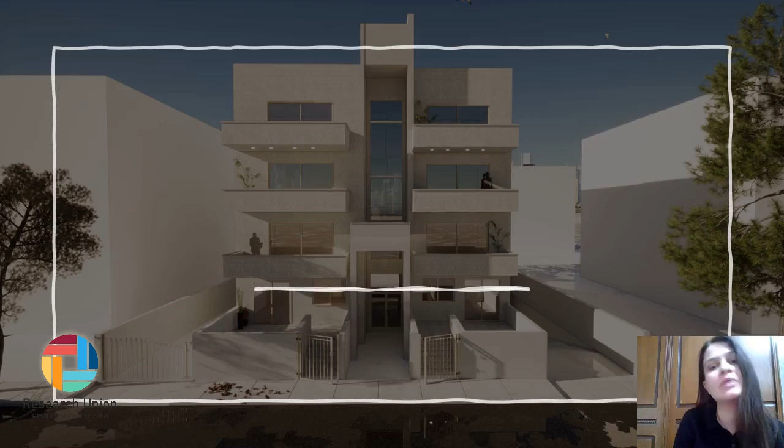My name is Dalia Al-Swatli, and I'm an engineer with a master's degree in advanced architecture.

Today, I will be discussing my latest research, a comprehensive evaluation of thermal performance and time lag in residential buildings or residential apartments, a numerical simulation study on phase change material and mycelium integration in Amman.

In this conference, I will be discussing the introduction, methodology, results, and discussion, then wrapping it up with my conclusions and recommendations on this research.

Starting with the introduction, I will be dividing my title into three parts and discussing each part alone and the specificity of each term. Starting with the first part of the title: a comprehensive evaluation of thermal performance and time lag in residential apartments.

Why did I choose the specificity of thermal performance? Because, as I said in the title, this research was held in Amman, the capital of Jordan. Jordan is a country in the Middle East that has multiple advantages to live in, but one of its disadvantages is that it lacks energy sources, especially non-renewable energy sources.

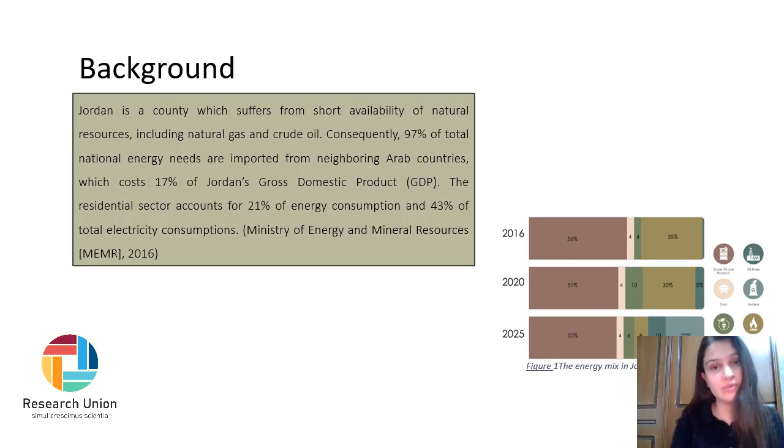As seen in this illustration that I have done, throughout the years from 2016 to 2020, and as predicted in 2025, the most reliance on energy consumption was on crude oil and its products. Crude oil is one of the non-renewable energy sources that here in Jordan we actually import from our Arab countries or nearby Arab countries, which means that we have a very huge problem since the most reliance was on crude oil, and it's an imported energy source.

Maybe some of you are now thinking about why don't we use renewable energy sources since it's everywhere and surrounds us, such as solar energy, windmills, and other sources. Because each energy source needs its own tools, and yet we haven't implemented the tools yet here in Jordan.

Starting with my title, I will be dividing it into three parts, as I said. The second part of the title is in residential apartments. Why did I choose the sector of residential apartments?

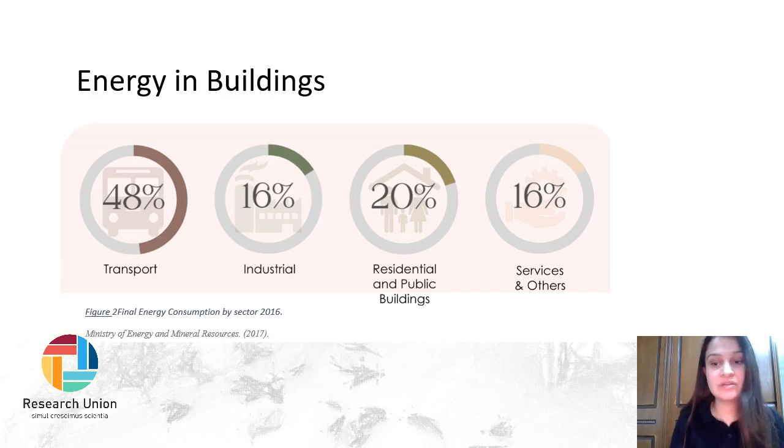As illustrated here, we have four main sectors in energy consumption. The first one is transportation, ranking first with 48% of energy consumption. Then what comes second is residential and public buildings, meaning residential apartments actually consume about 20%. It ranks second among sectors here in Jordan in reliance on non-renewable energy sources and in consumption of it.

The third and last part of the title is a study on phase change material with mycelium integration. This material is what I studied in this research, and it was what I thought of as a solution to the problem that I mentioned before.

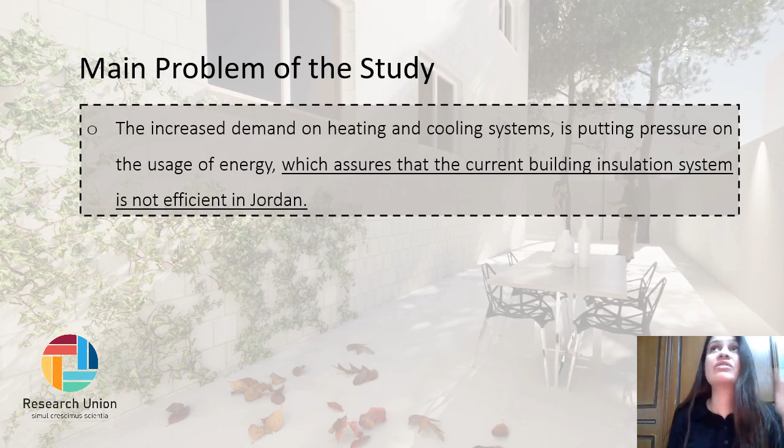What was the problem actually? The problem is that there's an increased demand on heating and cooling systems here in Jordan in the residential apartments and residential buildings, which means that there is an efficiency problem with the thermal insulation.

Starting with the material, the phase change material mycelium integration, it's actually a combination of two materials. The first material is phase change material. What is phase change material?

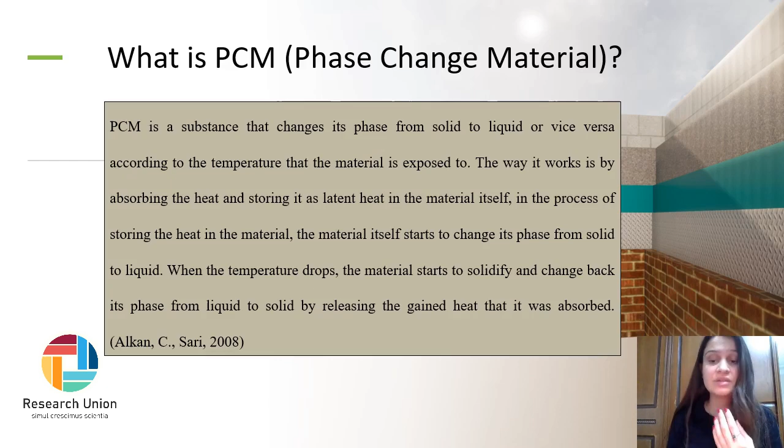Phase change material is actually a self-explanatory material because it changes its phase. It's a material that changes its phase when it is exposed to heat, from solid to liquid, and when the heat drops below a certain degree, it releases the heat that it consumed, turning its phase back to solid.

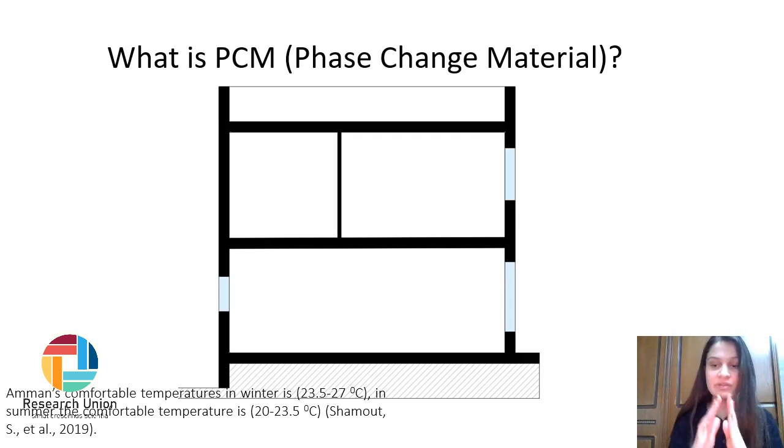How would I be using it in the residential apartments or residential building? It will be a layer between the layers of the residential envelope. What will be the envelope that I will be studying? It was the ground floor slab, the exterior walls, and the roof of the last level of the residential apartment—a specific envelope of the residential building. The phase change material will be a layer implemented between the other layers in the envelope.

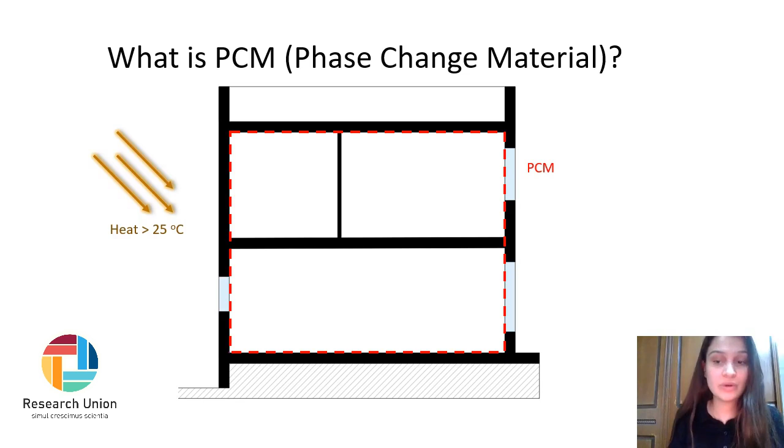How would it work? When the phase change material, or the envelope of the building, is exposed to 25 degrees Celsius of heat or even more, the phase change material will keep on absorbing the heat, decreasing its entrance into the enclosure, saving the enclosure's perfect temperature and perfect environment. Then, when it absorbs the heat, by default, such as an ice cube, it will change its phase from solid to liquid.

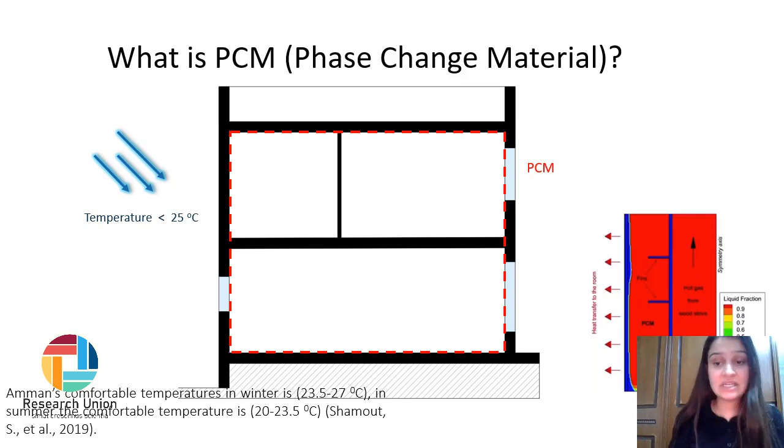When the exterior temperature drops beneath 25 degrees Celsius, the phase change material will start to solidify, changing its phase from liquid to solid, which happens when the outdoor temperature is a bit chilly.

Here's an illustration showing how the phase change material changes back to solid while releasing its heat into the interior.

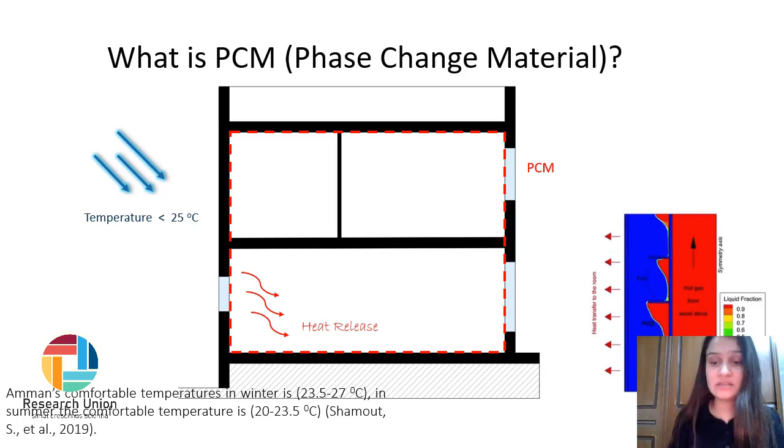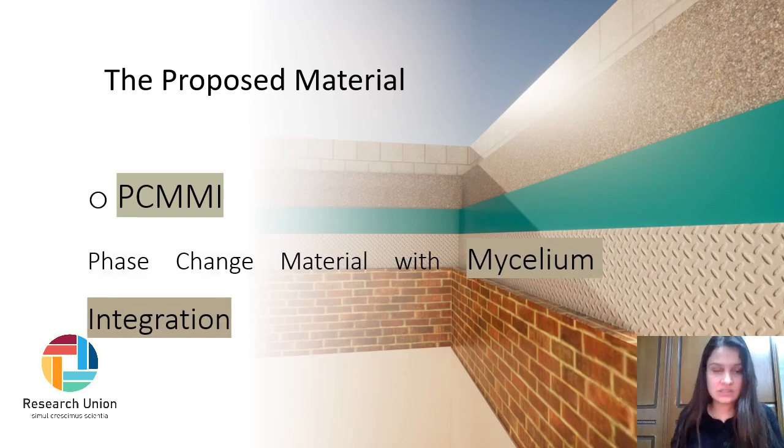The second material in the combination of phase change material mycelium integration is mycelium. Why did I choose this specific material? What is mycelium? It's a deciduous fungus, a material that surrounds us everywhere—you can find it everywhere.

Multiple researches have been done on mycelium in architecture, and most of them recommended studying this material with phase change material, which is what I've done here. Mycelium boosts the thermal performance of phase change material, acting as a thermal booster for it as an insulation.

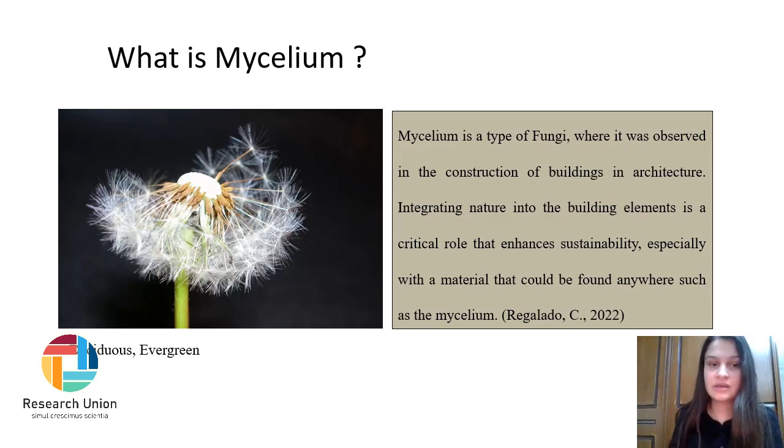So here comes the phase change material in a general way, with mycelium integration. Again, the envelope I will be studying here is the roof, the ground floor slab of the residential apartment, and the exterior walls of the residential building.

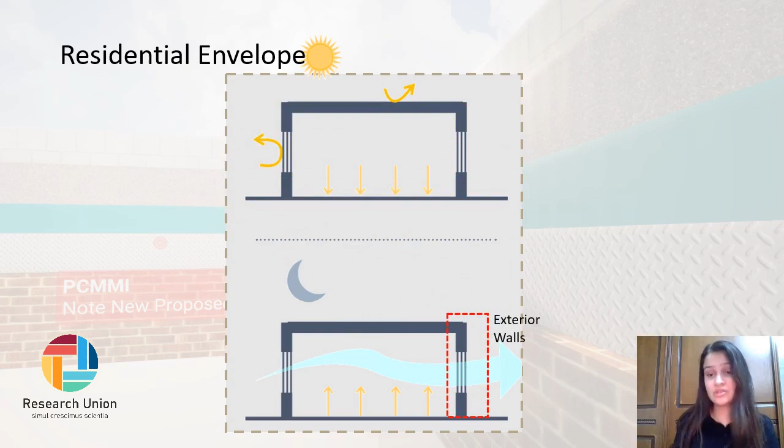To wrap things up, what is my main problem here? Residential buildings in Jordan have heat gain in summer, meaning we need to power the AC and use more electricity to cool the enclosure, while in winter there is heat loss, meaning the building isn't helping itself—we try to heat it, but the heat escapes somehow.

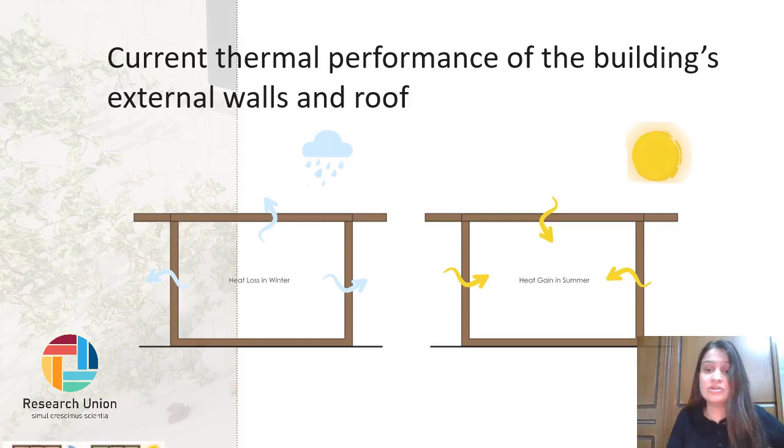My solution was to turn the residential building into what is called a thermal mass. What is thermal mass? It's when the building or residential apartment is able to cool itself and heat itself on its own, which is what the phase change material mycelium integration will do by implementing it as a layer in the envelope.

In the daytime there's heat absorption, decreasing the amount of heat entering the enclosure and, by default, the energy needed to cool it. At nighttime or on colder days, the phase change material releases the heat it absorbed earlier, decreasing the amount of energy needed to heat the interior.

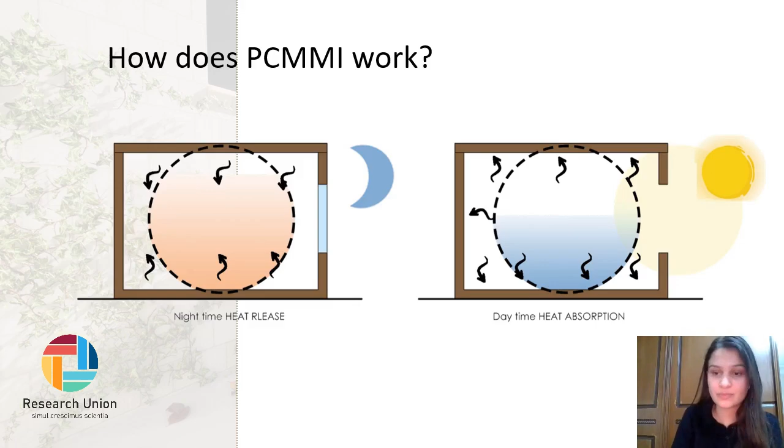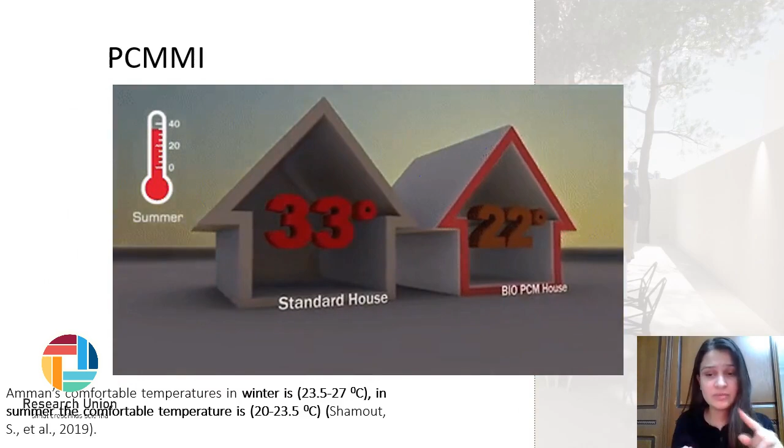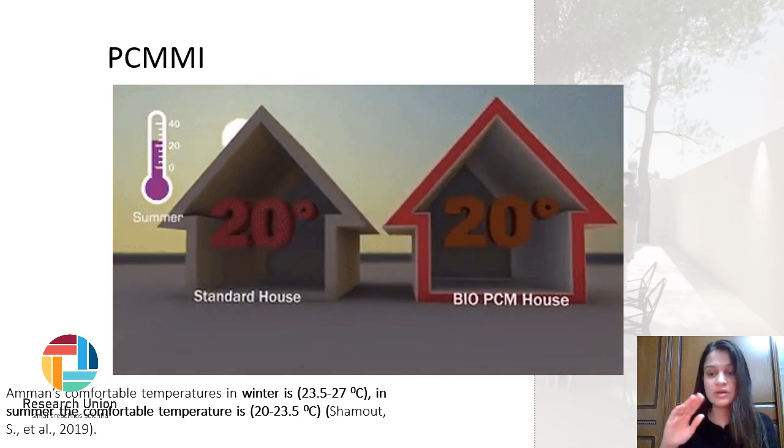Here's an illustration showing two buildings, one without the PCMMI and one with it. Without the PCMMI—the one without the red outline—you can feel the full spectrum of temperature throughout the 24 hours of the day, while with the PCMMI, the temperature is kept comfortable, only between 19 to 21 or 22 degrees Celsius.

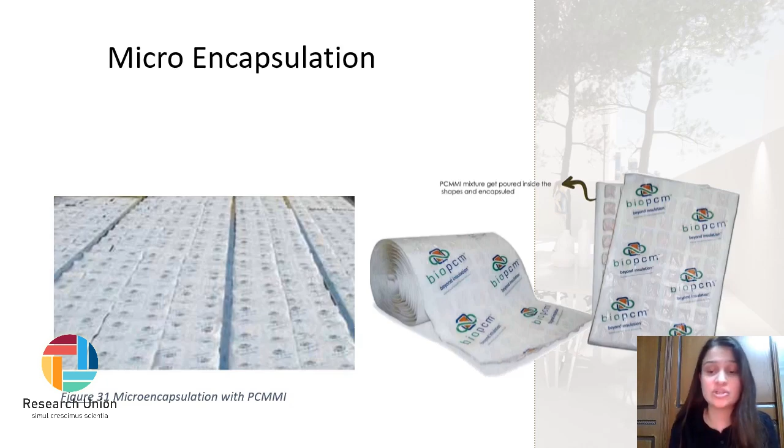Now I know there's a question popping up: the phase change material changes phase into liquid at some point, so how wouldn't it leak into the interior? That's by using microencapsulation, a type of enclosure used only for the phase change material mycelium integration or bio PCM. The mixture is put into these encapsules, which are then closed, allowing it to expand and shrink without leaking into the interior.

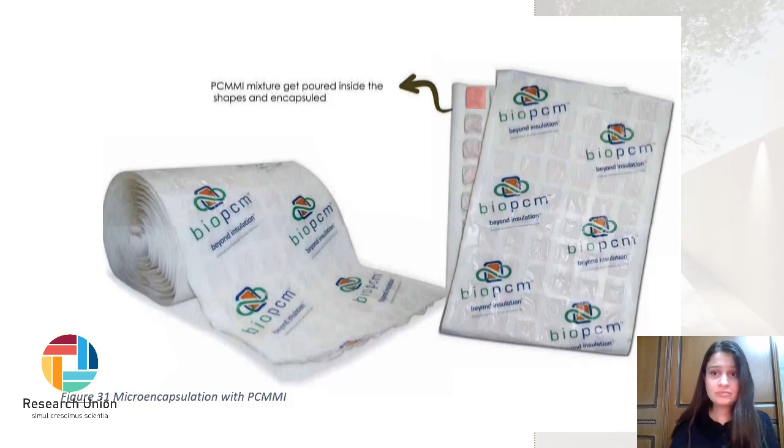PCMMI in Jordan can be found on the eastern side of the Dead Sea because it's a type of salt, since I've studied the inorganic PCMMI.

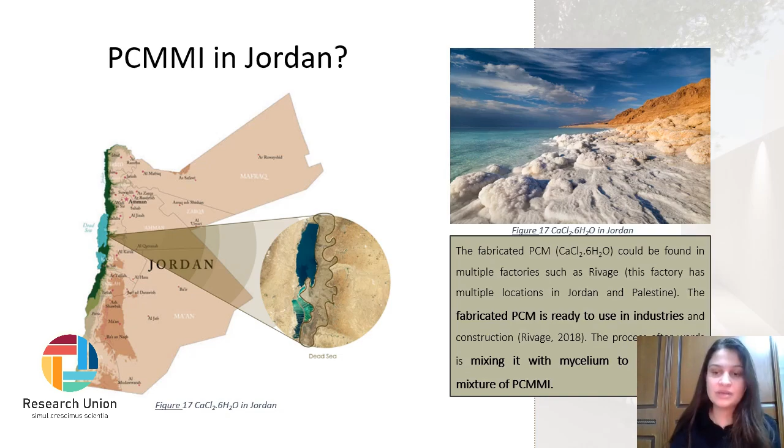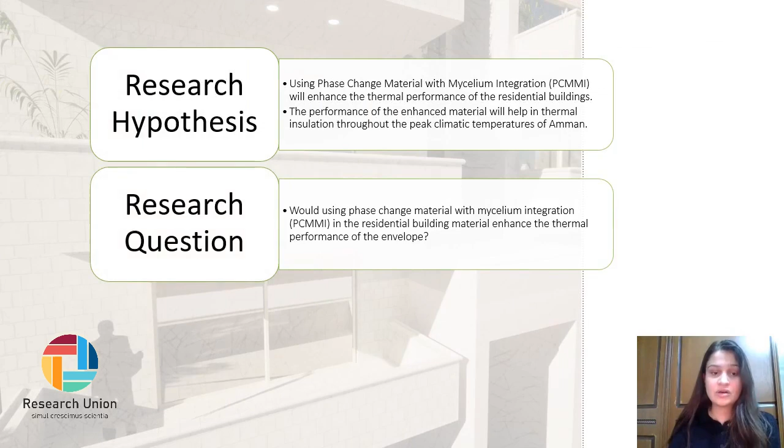The research hypothesis, research questions, and research objectives will be achieved and answered throughout the methodology now.

The second part of this conference will be the methodology. I've conducted two methodologies throughout this research: the first is a numerical simulation, and the second is parametric analysis.

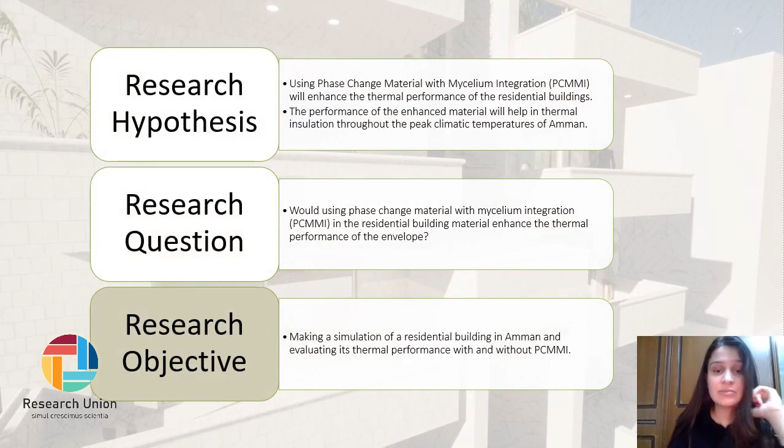In order to achieve my objective, which is making a simulation of the residential building in Amman and evaluating its thermal performance, I need to make a simulation, because how else would I understand how the PCMMI would work?

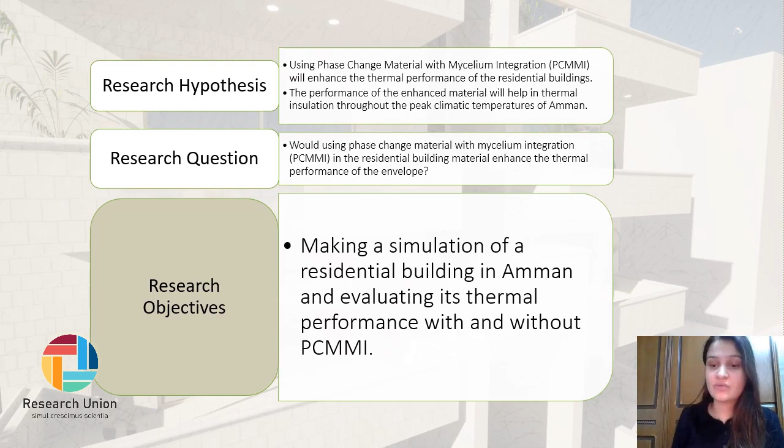Because we actually don't use it here in Amman, but we could. But how would I know its performance? That's by just simulating it, doing a simulation.

In order to understand how to make a simulation, I needed to understand what my main variable was for choosing the residential apartment to simulate, because I needed something actually constructed in real life. Throughout the references, I found that Jordan has three main climatic zones: Badia and desert, which is number 3 on the right side of the slide; the middle, number 2, which is the highlands; and the lowlands, number 1, on the left side.

I chose a residential apartment in Amman, the capital, in the climatic zone of the highlands, which means the results of this research could be validated and generalized for residential buildings, type residential apartments, in a highlands climatic zone in Jordan.

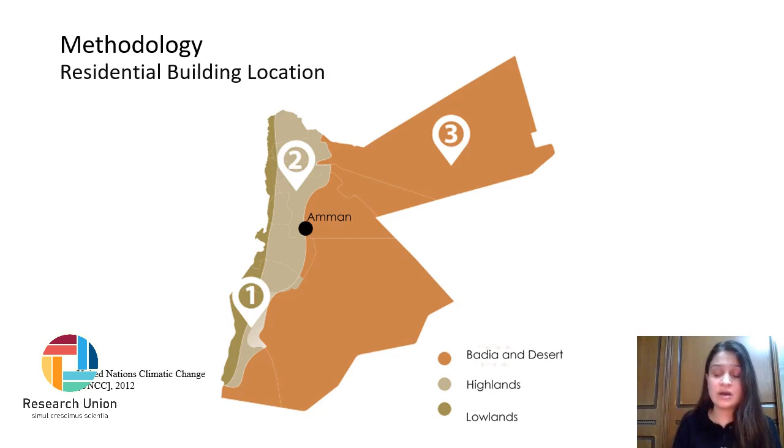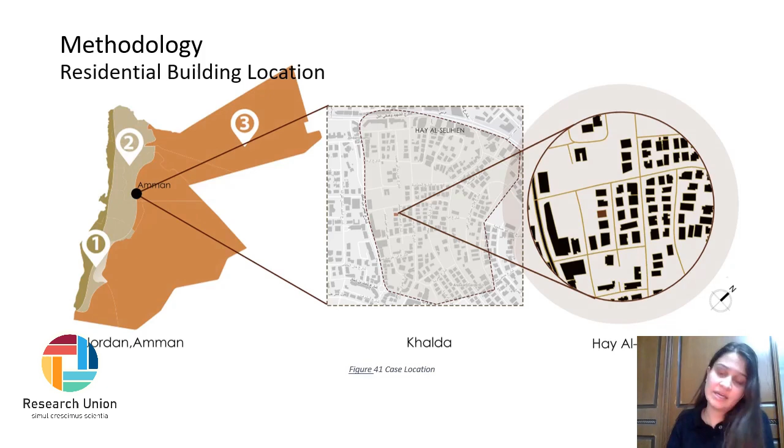I've chosen a residential apartment in Khalda, a neighborhood in Amman, the capital of Jordan, in the climatic zone of highlands. Here are some specifications of the residential building.

I've chosen the residential building type residential apartment because 83% of the residential buildings in Amman are residential apartments. More specifications follow.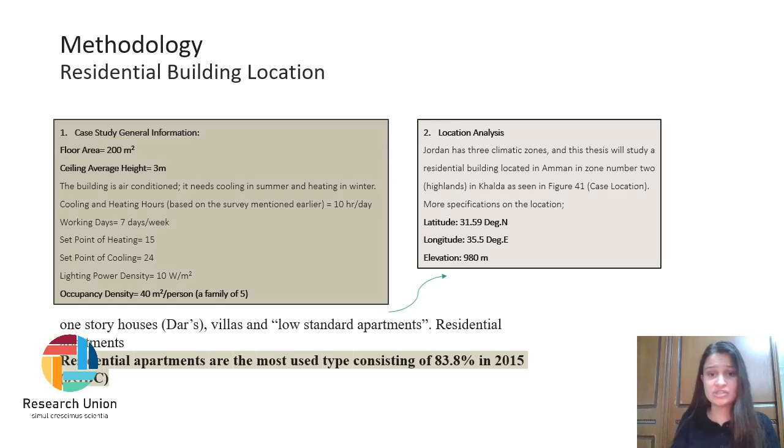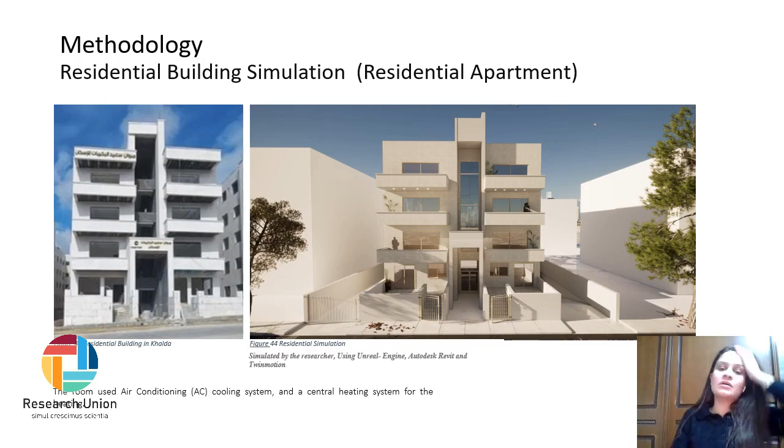More specifications: this is an apartment for a family of 5.

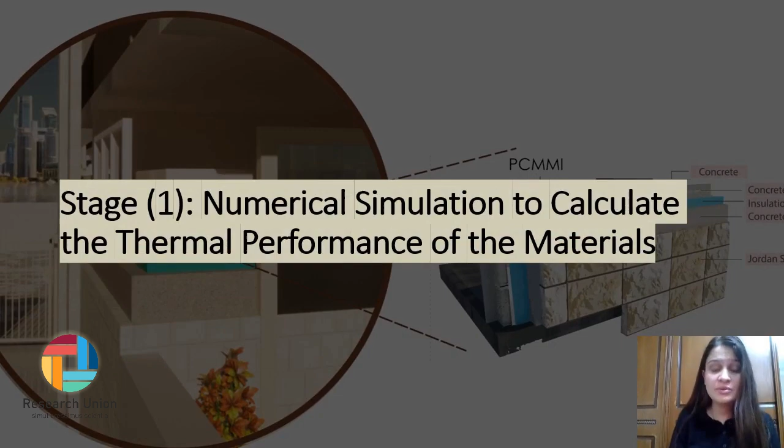Starting with my first stage, which is a numerical simulation to calculate the thermal performance of the materials. We can see that the first stage is a numerical simulation. What is a numerical simulation?

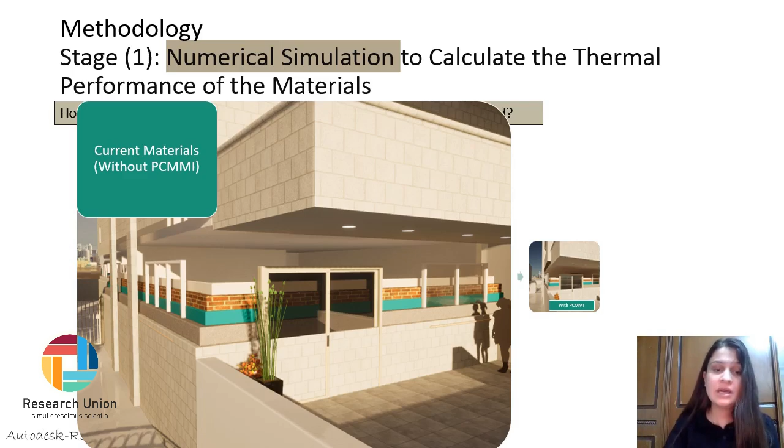It's that I simulated the residential building I mentioned before, once with its current materials, without the PCM, where the layering of the envelope is as it is now, and once with adding the layer of PCM into the envelope of the roof, the ground floor slab, and the exterior walls.

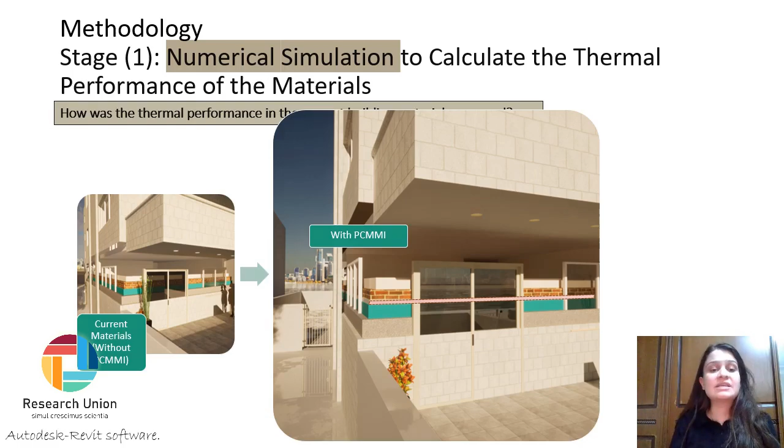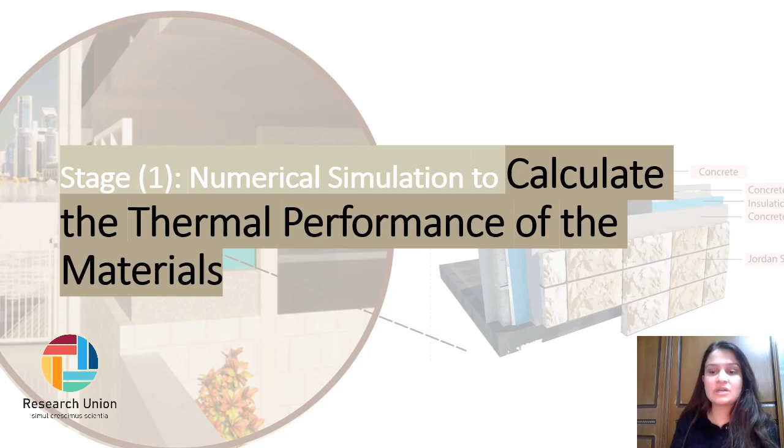Stage 1 is calculating the thermal performance of the materials. How would I calculate the thermal performance of the material? That is by measuring what is called the U value, which is the thermal transmittance.

Thermal transmittance could be calculated by knowing its equation, which is U equals 1 over R, 1 over the resistance. In a very simple manner, the lower the U value, the better the thermal performance.

This stage mainly depends on measuring the U value, which is the thermal transmittance. As I said, in a very general manner, the lower the U value, the better the thermal performance there is. So what does the U value depend on?

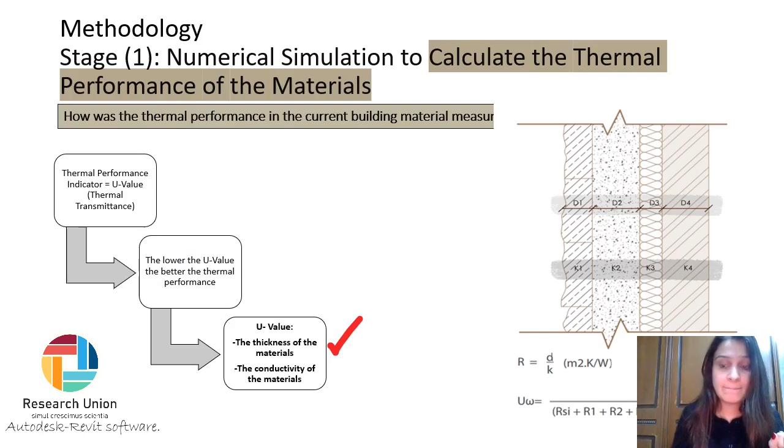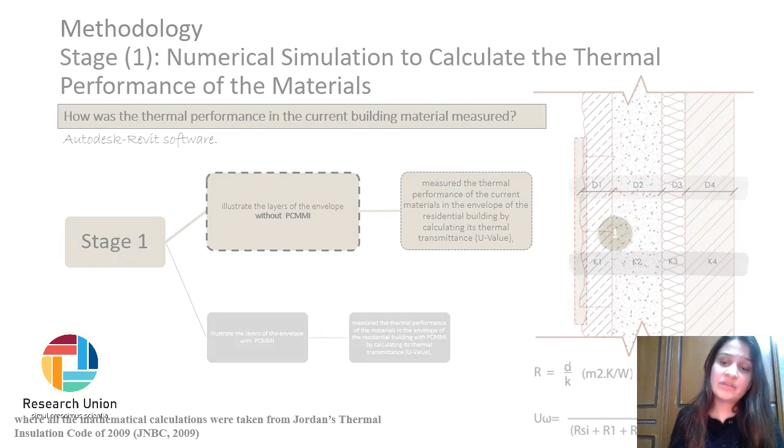It depends on the thickness of each material and its conductivity, which means throughout this methodology I will be splitting it into two parts. The first part, in this stage, is illustrating and doing a simulation of the residential building with its current materials, knowing each material of the envelope with its thickness and conductivity, to calculate the U value. Then doing the same with adding the PCM.

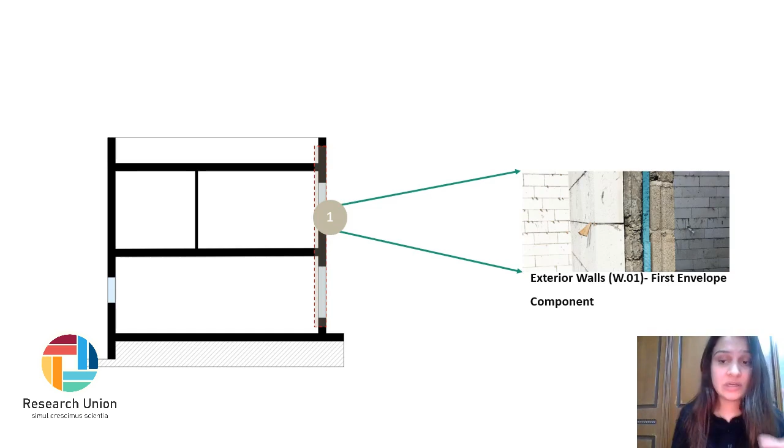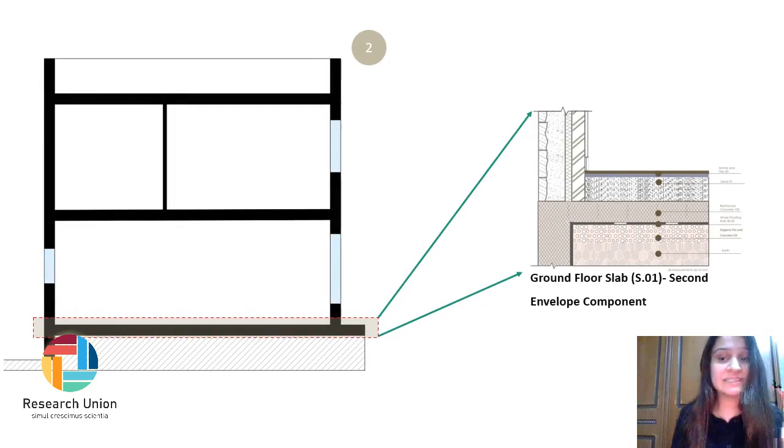Now calculating the U value without the PCM, which means the current situation of the residential apartment, starting with the envelope, which is the walls. I illustrated its thickness and conductivity. For the ground floor slab, I illustrated its thickness and conductivity as well.

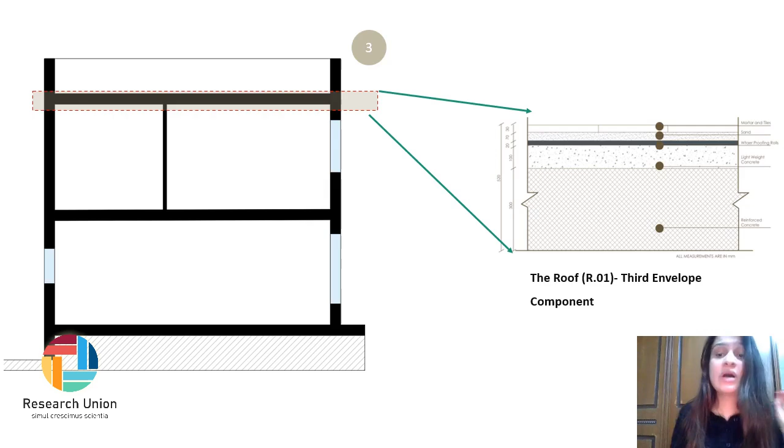In addition to the roof, now I calculated the results of the U value for the current situation. I calculated that the U value was 0.75 watts per meter squared Kelvin.

How would I know if this is a good indicator or not? I compared it with the codes. There's a maximum code here in Jordan that it shouldn't exceed, which is 0.57 for the walls. And it did exceed it, which means that the thermal performance of the wall in its current situation isn't good.

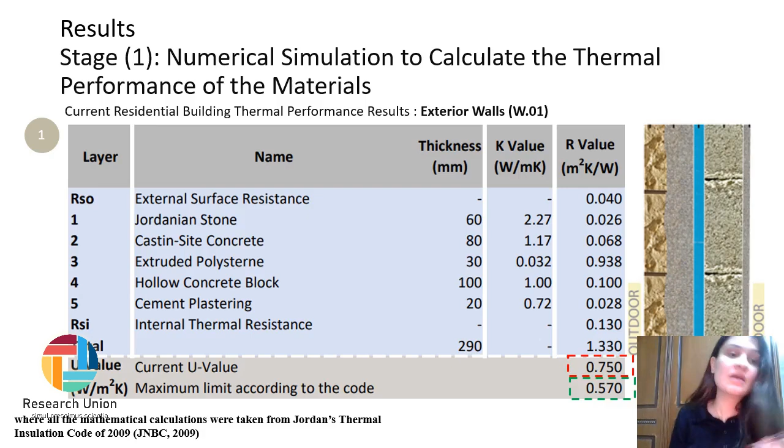I did the same for the ground floor slab, finding that it had a U value of 1.6, when it shouldn't be more than 1.2.

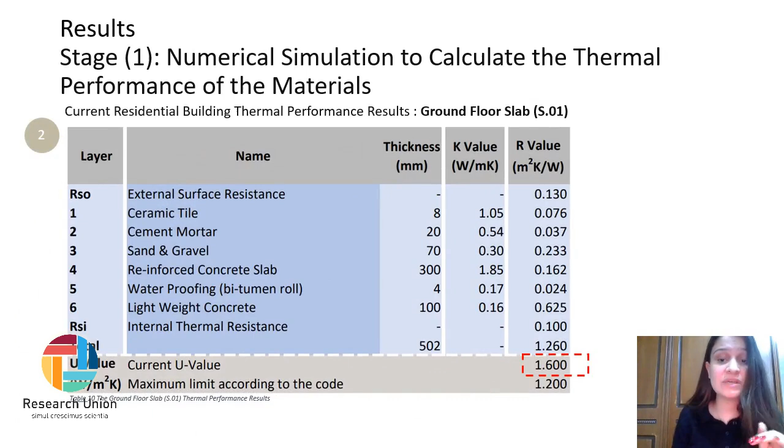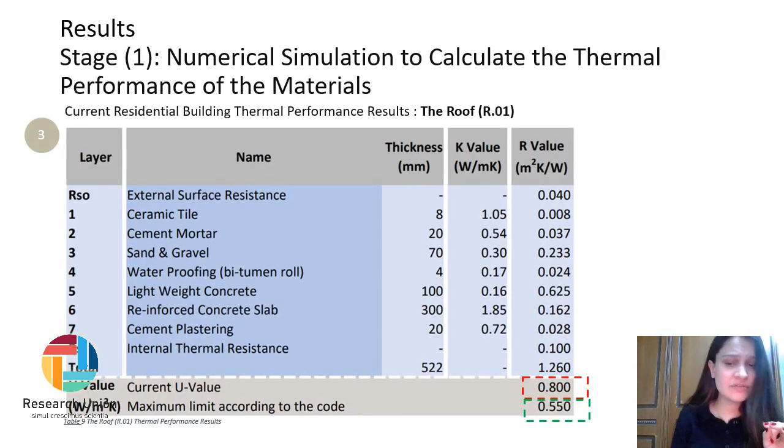The roof shouldn't exceed a U value of 0.55, but it exceeded it, reaching 0.8.

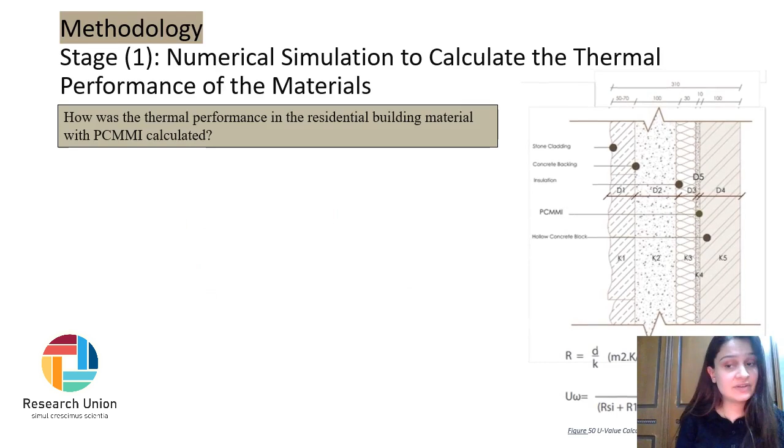Now the second part of the stage, which was illustrating the residential apartment with adding the layer of PCMMI. I situated the PCMMI as the references told me how to, based on the literature I read, and I situated it knowing that the thickness of the rolls wouldn't be more than 10 millimeters or 1 centimeter.

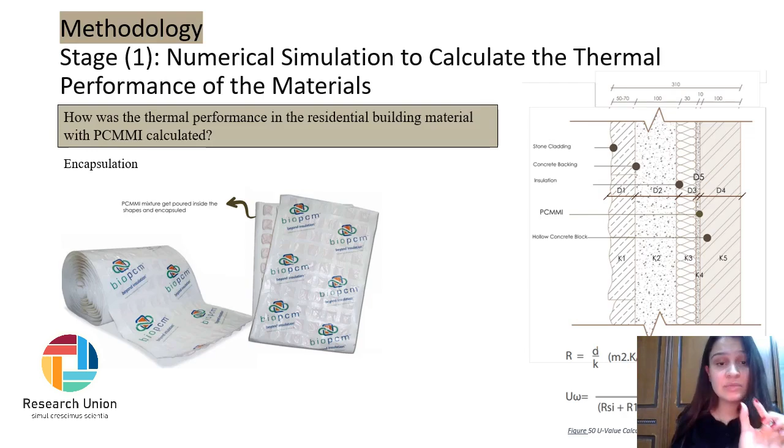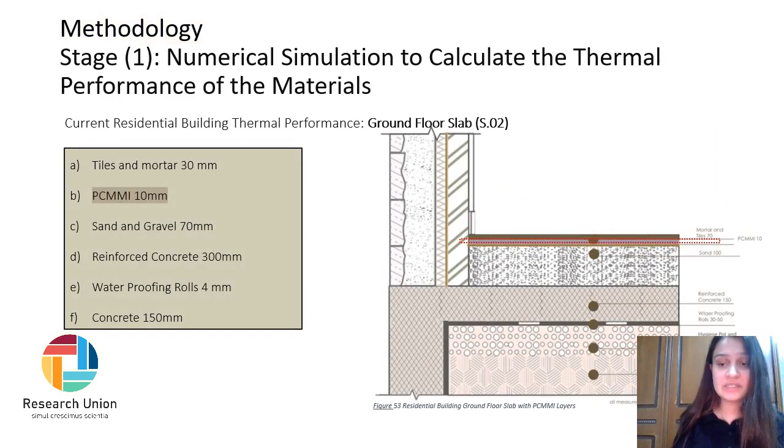Here is an illustration of the wall with PCMMI, the ground floor slab with PCMMI, and the roof with PCMMI.

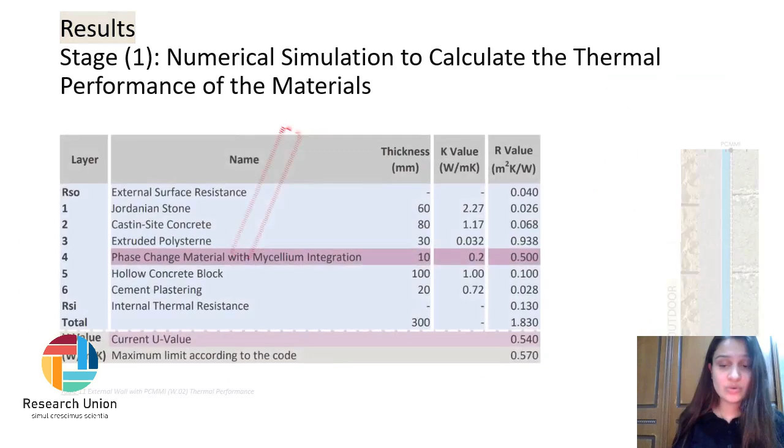The U value result here showed that it shouldn't be more than 0.57, and it was 0.54, which means it's even better than the codes with adding PCMMI to the walls.

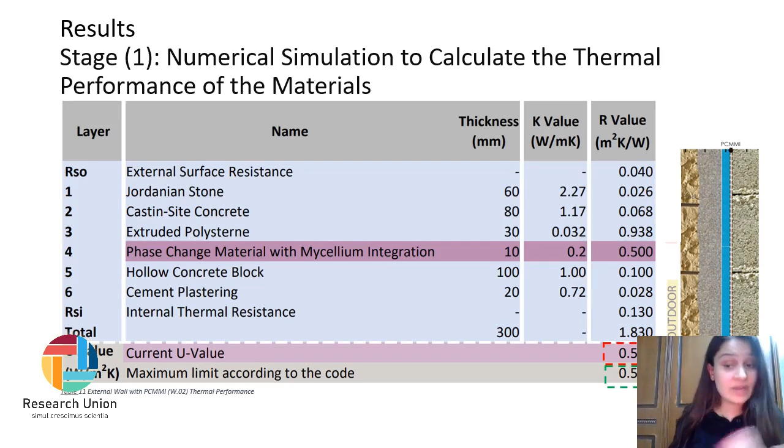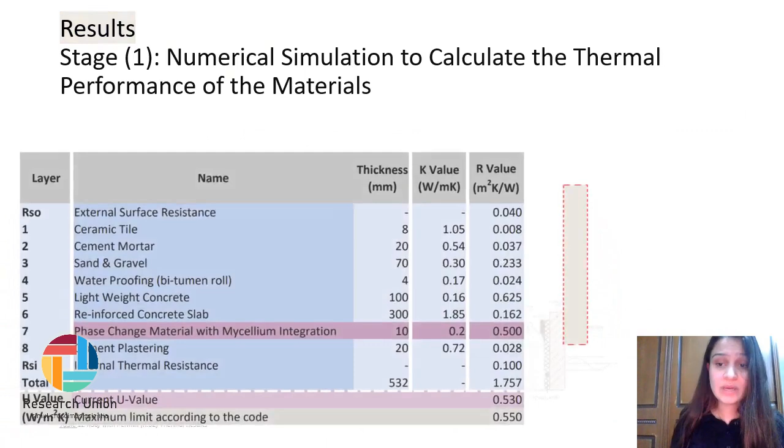And the roof as well achieved a very good thermal performance, with a calculated U value of 0.53, which shouldn't exceed 0.55 watts per meter square Kelvin.

This means that at this stage, I achieved the objective because I illustrated and simulated the residential building and compared it, answering the question and confirming the hypothesis that PCMMI will enhance the thermal performance, as the numbers showed. Yeah, it did.

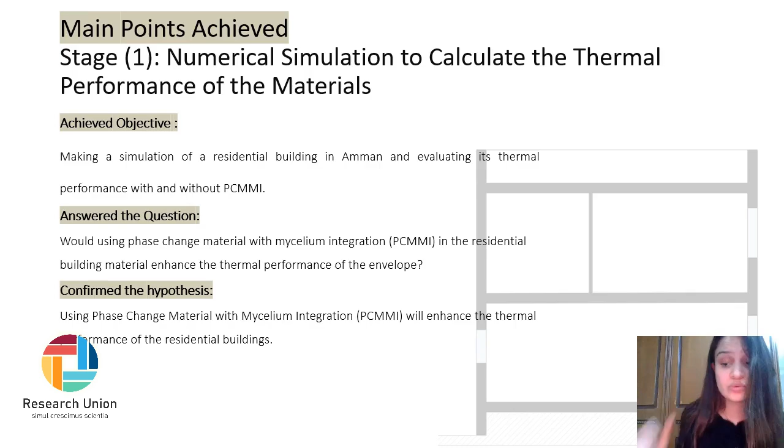The second stage is a parametric analysis to calculate the time lag of the material in the components of the residential envelope. How would I be calculating the time lag?

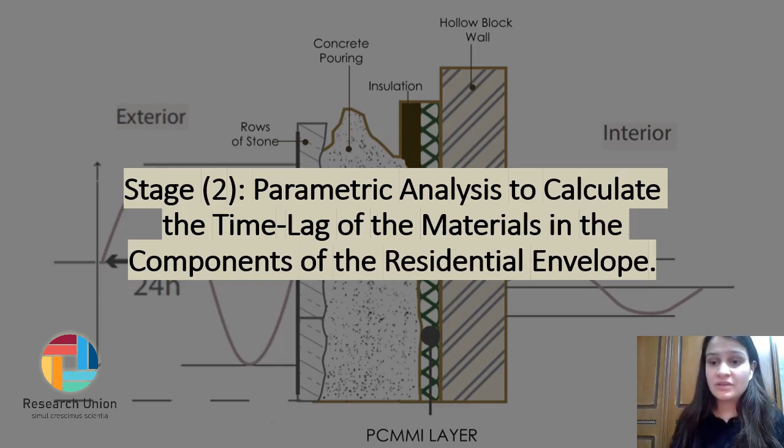Because time lag, as we all know, is something that couldn't be calculated without measuring it in real life. So what I did is simulate it and add parameters through a parametric analysis. What is time lag?

Time lag is the amount of time that the residential envelope will resist the exterior temperature entering the interior, or vice versa, the interior temperature exiting to the outdoors, which means the more the time lag, the better.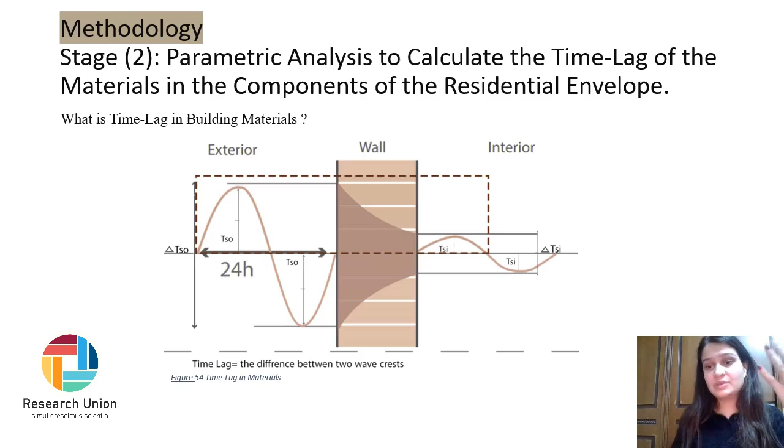So I did this parametric analysis by putting in all the variables I studied throughout this software: the albedo and reflection, the setbacks, the materials, the surroundings, the vegetation, everything in the climatic area.

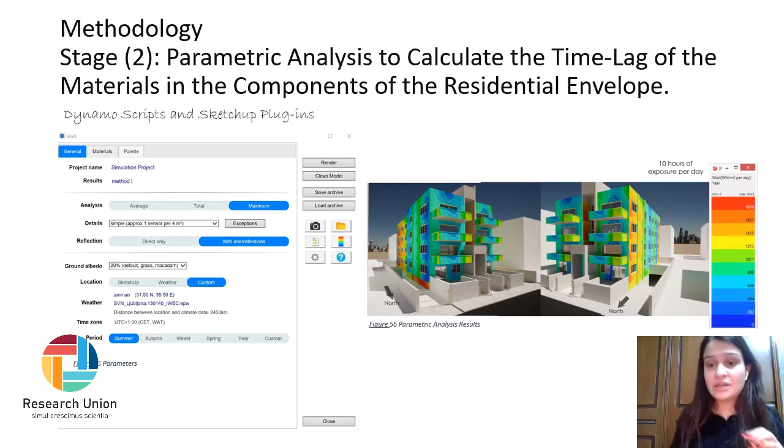In order to calculate the specific time lag, I put sensors on each 4 meters square, one sensor, in order to understand the time lag and calculate it in a very good way.

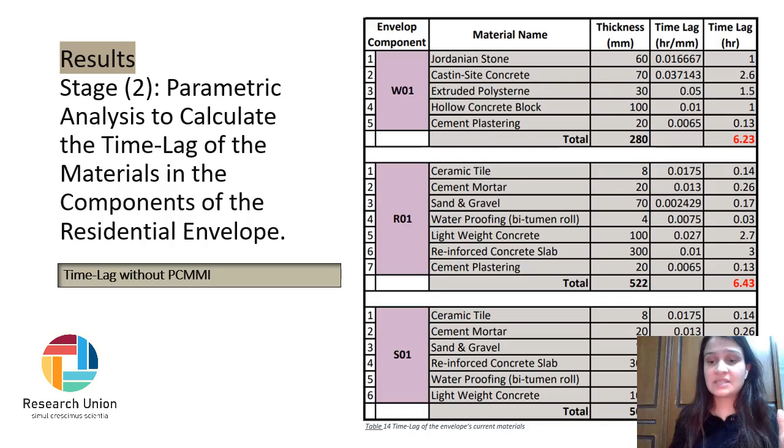So the time lag in the current value was an average of 6 hours, while adding PCMMI enhanced it to 8 hours, a 2-hour increase in time lag, which is really good.

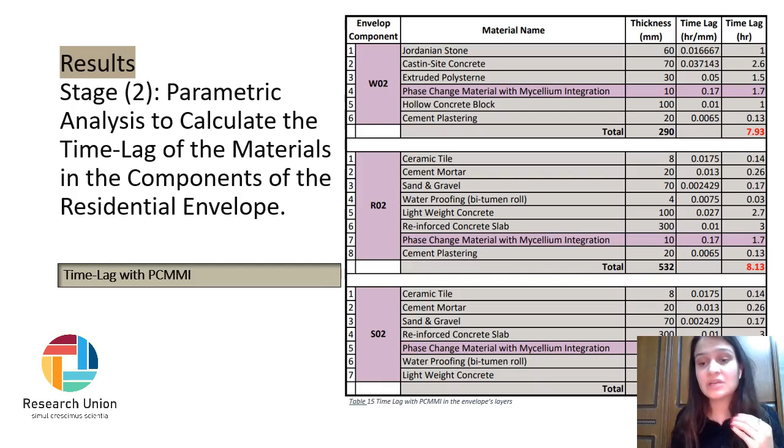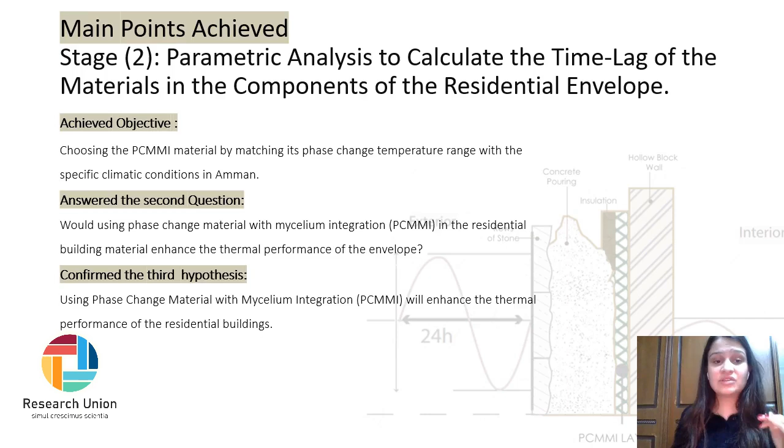Throughout this stage, I achieved my objective and answered the second question, confirming that it will enhance the thermal performance, as it did. My conclusions and recommendations are here.

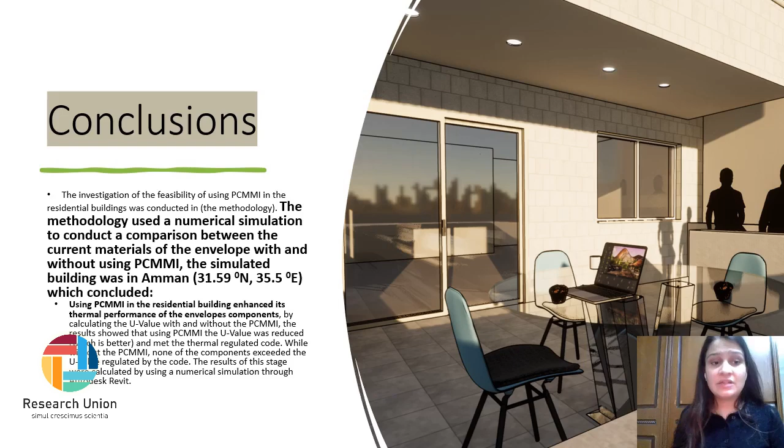Adding the PCMMI will enhance the thermal performance, as calculated by the U value, while without adding the PCMMI, the envelope didn't exceed the code requirements, which means the thermal performance situation isn't as good. It's not even good.

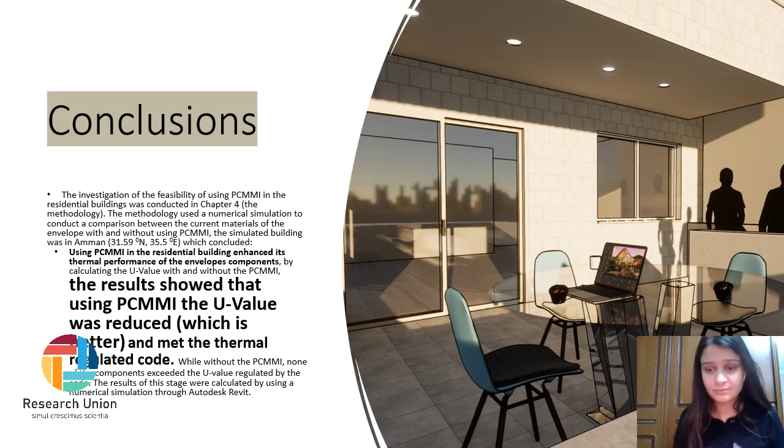While adding the PCMMI, it exceeded the code, and it was perfect for it.

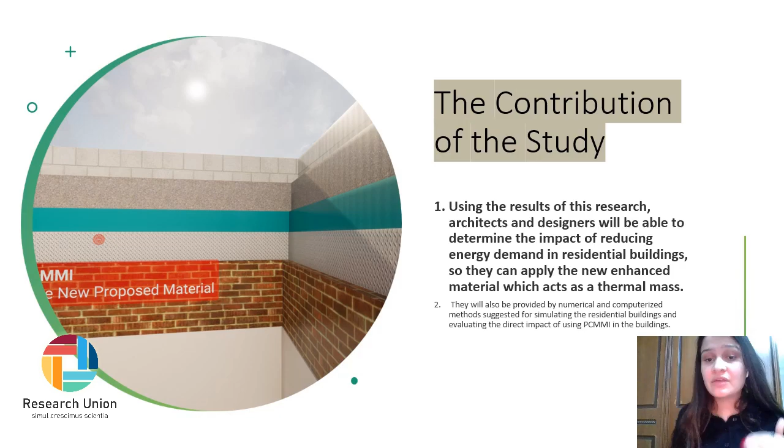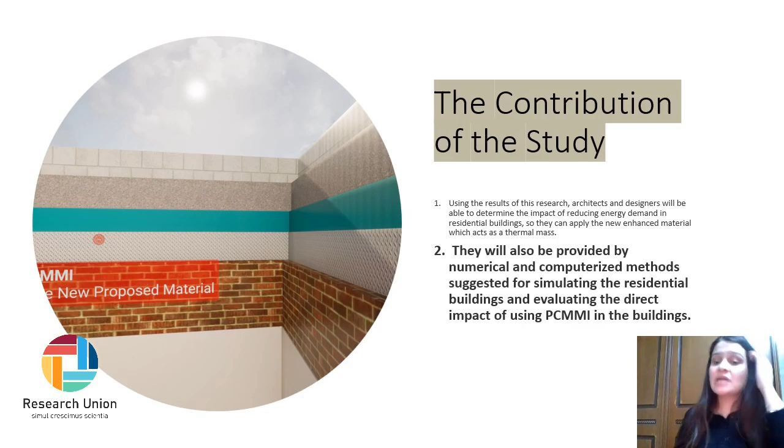My contribution to the study is that using the results of this research, architects and designers will be able to determine the impact of reducing energy demand, and they will also be provided with numerical and computerized methods suggested for simulating residential buildings, such as the numerical simulation and my parametric analysis, because it's the software I've developed.

The limitations of my study are that there were no studies found in Jordan studying PCMMI, and obtaining some important information from MEMR and other sources was difficult. All of those were limitations for me.

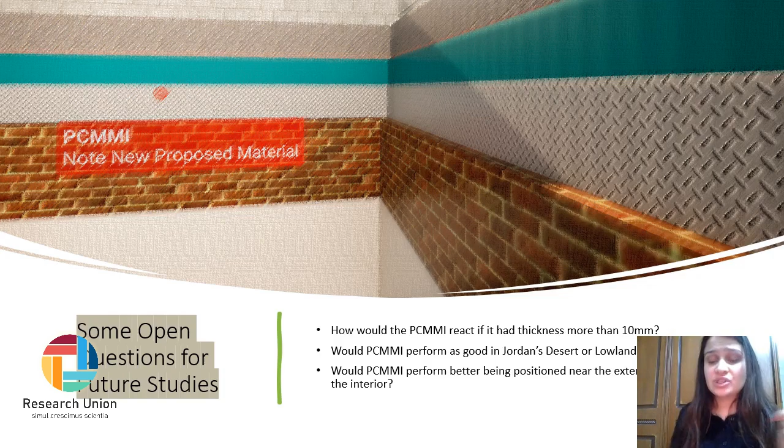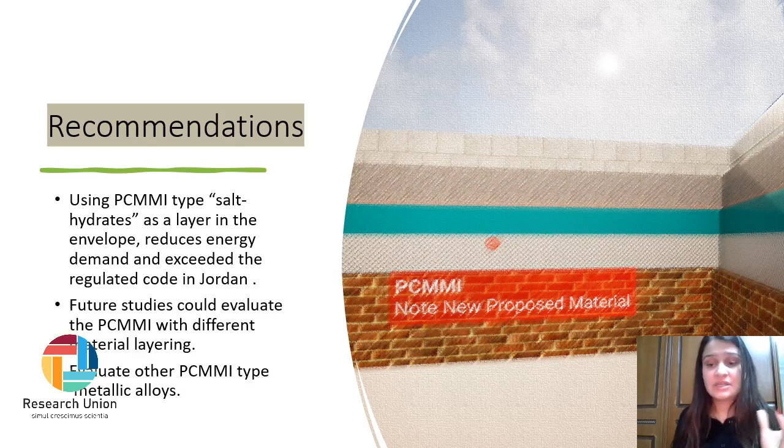It achieves very good results, and I do recommend using it in real life. Future studies should evaluate PCMMI with different material layering, in different ways than I did.